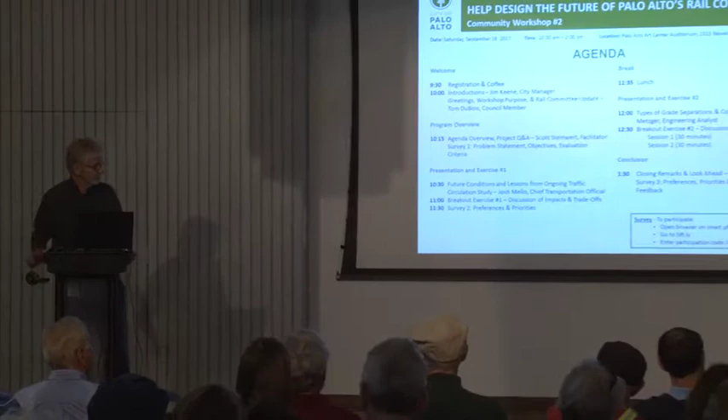Thanks, Jim. So $2.50 in 1863, that's quite a bit of money back then. So I guess Caltrain's quite the deal.

I just want to echo Jim and thank everybody for coming out this morning and participating in the process.

So today what we're going to do is work on several key components that'll help us move forward in defining alternatives for grade separations. The first thing we're going to do is confirm the definition of the problem statement. This has been reviewed and refined over the last couple of months, and was the subject of the first community workshop. Then we're going to move on to focus on finalizing the objectives and the evaluation criteria. These have been developed based on what we heard at the first workshop, as well as additional community input gathered since then. We're also going to get a sneak preview of some early data from an ongoing circulation study.

The primary conclusion I take from that study is that the real focus here is on future conditions. Caltrain itself is going to run more trains, and if high-speed rail comes, those will be additional trains. So we're looking at 20 trains an hour during peak periods, and we're also looking at an assumption of about a 15% increase in traffic in that same time frame. So there really is not an option to do nothing. That's why we're here. It's not necessarily today's conditions, but really thinking about those conditions that are going to be here in a few years.

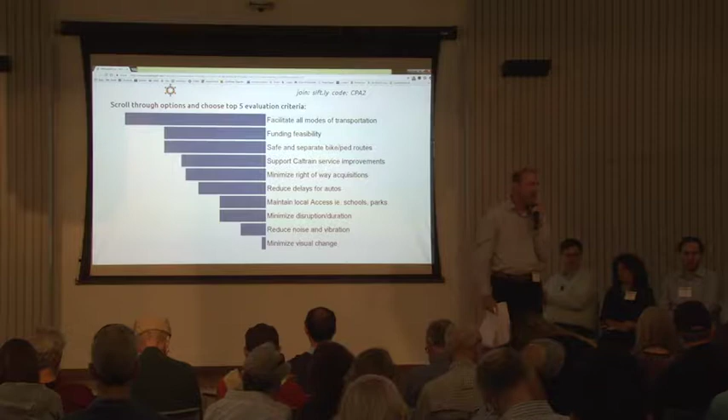So this is just to minimize acquisition — that would be adjacent properties, so private properties, to make any kind of improvement. Sometimes to build a grade separation you might have to acquire property from private properties around there. So the idea would be that if that's important, it's to minimize doing that with any alternative.

I think the first one is aimed at being a benefit, facilitating all modes would be beneficial. Reducing noise and vibration, that's kind of a benefit, addressing making things better than they are now. But if there are specific benefits, those are good comments to write down so we can capture that.

Yes, yeah, think of it in that context. Yes, sir. What's that?

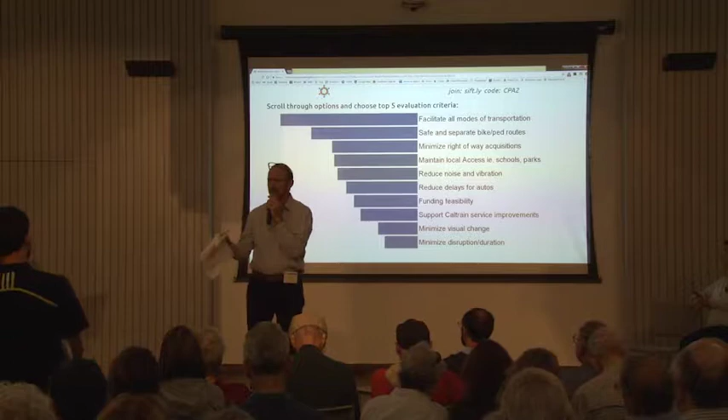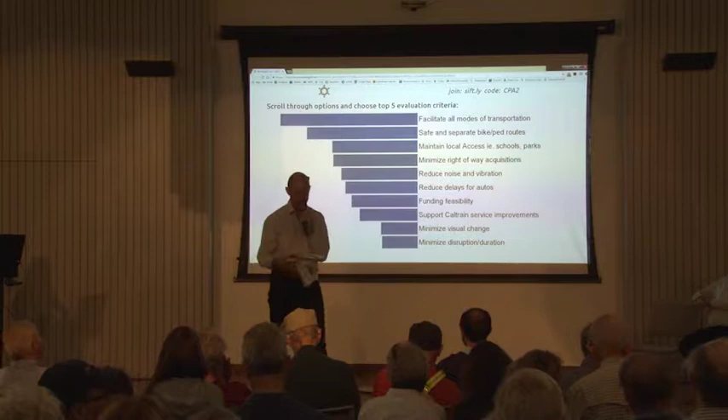Vitor has a microphone. You're talking about having a younger generation involved in the decision of this, as opposed to the older. I'm saying something very simple: for each one of these, do it first for people over 40, then under 40. It'll add maybe 1 or 2 minutes, and see if it makes any difference. Maybe we can try that at the next one. We don't have time today, but that's good. Maybe we can try that in future surveys to see if there's a difference of opinion based on age category.

Okay, all right, I think we need to move on. We've got the last few votes. That's the last one, okay.

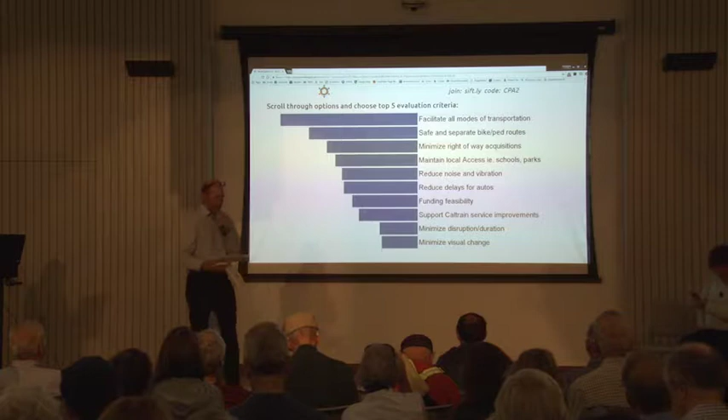So we're going to move on to the second part of the agenda and have a presentation by Josh Mello about the future conditions and lessons learned from the traffic evaluation. And then after that, we're going to break into some groups around the room and have some group discussion.

Wow, so after that I'm a little hesitant to get up here. Please go easy on me. I'm going to give you a presentation. I'm Josh Mello, the city's chief transportation official. I manage the city's transportation division, which is everything from traffic signals and pavement markings to our shuttle service. And I'm the lucky one who gets to be the project manager for this Connecting Palo Alto process.

I want to thank everybody for being here, I really appreciate it. This is really good turnout. This is going to be messy throughout this process because you are coming along with us. Part of this process is we're going to be very transparent and you're going to see the sausage being made, and that's why we're going to have these kind of somewhat awkward discussions and we're all going to be working through this.

So what I'm going to present, I'm going to have to go a little bit quicker than I originally intended because we lost some time early in the morning, unfortunately. I'm going to talk a little bit about an ongoing circulation study where we've done some preliminary modeling runs to look at what happens if, and I'll talk a bit about those ifs as I get into this.

So we did a study using models that are best practices in traffic engineering. They are models though, so everything I present is hypothetical and based on a computer program. It's not airtight, it's not 100%, but I think it's going to give you some ideas about what the future is going to look like if we do nothing, and then what if we do move forward with some projects.

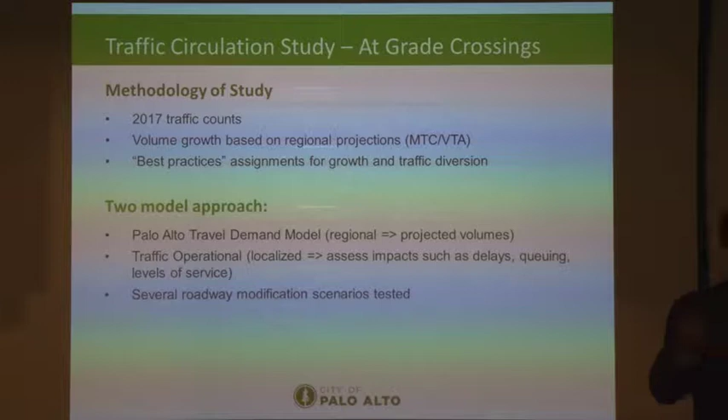Then we projected growth out to 2020, 2025, and 2030 using the regional growth models. So MTC and VTA have zones - the whole region is broken up into little zones, and they assign the number of jobs and the number of residents that they expect to inhabit or work in each of those zones in defined time periods. So we use that.

We did a two-model approach. We do a very macro level model, which uses a program called Cube, and that is accepted by MTC and VTA. It's a very standard practice when modeling roadway projects, but again, it's a model, so it's not 100%. Then we use a second program called Synchro, which delves down a little deeper and looks at traffic signal operations and projects out the queues, the number of vehicles that will back up during the peak hour, and looks in more detail at the operation of the intersection.

So I'm going to talk a little bit about train frequency. This is average, so we're not talking about the actual schedule. If you pull out the Caltrain timetable, a train at 5:12 and 5:15, we look at the number of trains throughout the peak hour, and then we calculate what the average is during the peak hour. So there's going to be a little bit of difference in what you see versus what the actual schedule is. So for example, today, trains come on average every 10 minutes during the peak hour.

That top chart is in 1 minute increments, and the green arrows represent when traffic can flow across the tracks, and the red bars represent when traffic is stopped and the gates come down. So the top is the average. Every 10 minutes today, the gates come down during the peak hour and traffic is stopped. In actuality, a train comes at 14 minutes past the hour, 16 minutes past the hour, then there's a gap, 36, 40, 44. This is both directions during the peak hour.

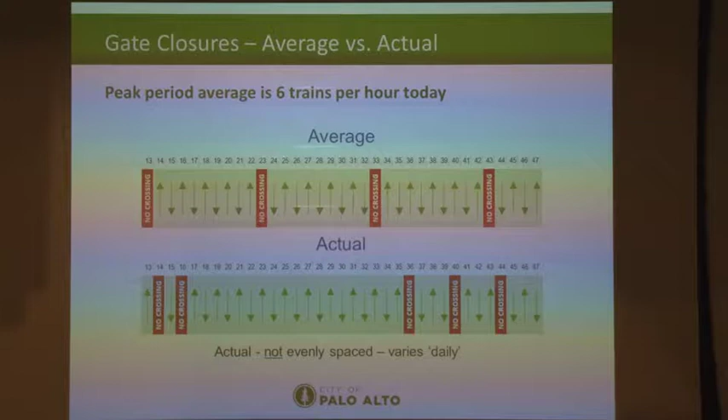Yes. This is the average during the peak hour, this is not the exact. There is 6, in one peak hour there is 6 trains, yes. I'm going to talk a little bit more about that when we get further along.

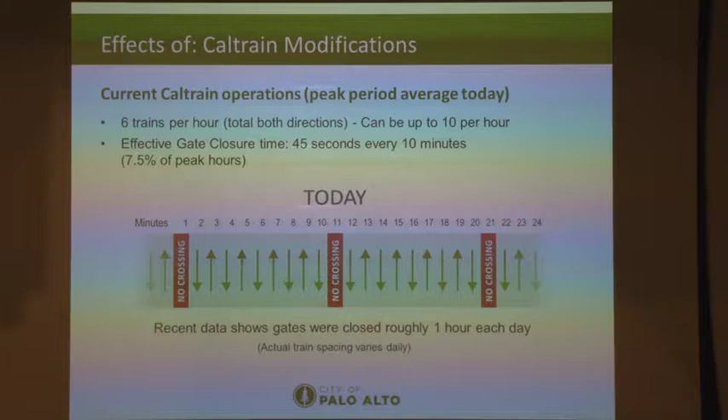So current Caltrain operations, 6 trains per hour total both directions, on average. During one hour, there are 10 trains per hour - you are correct, but not every peak hour has 10 trains per hour. The average is 6 trains. And that really, when we start to look at the analysis, we're really talking about total cumulative gate downtime, and we'll talk about that a little bit more. But the specific increments of the trains is not as important as the total time that the gates are going to be down. So the effective gate closure time today: 45 seconds of every 10 minutes the gates are down and traffic is stopped, and that adds up to about 1 hour per day. So 1 hour out of every day, the gates are closed and traffic is stopped. That's today, 2017.

I hope that was a joke.

So when Caltrain is modernized - is everybody familiar with the Caltrain modernization project? It's 2 components: upgrading their signal system through what's called CBOSS, and don't ask me what that is - it's a modern train signaling system that allows them to move in moving blocks instead of fixed blocks, which is the older way that train corridors were signalized. They're also electrifying the corridor, which allows trains to start and stop more quickly than diesel trains, so they'll be able to run more frequent trains, is the bottom line.

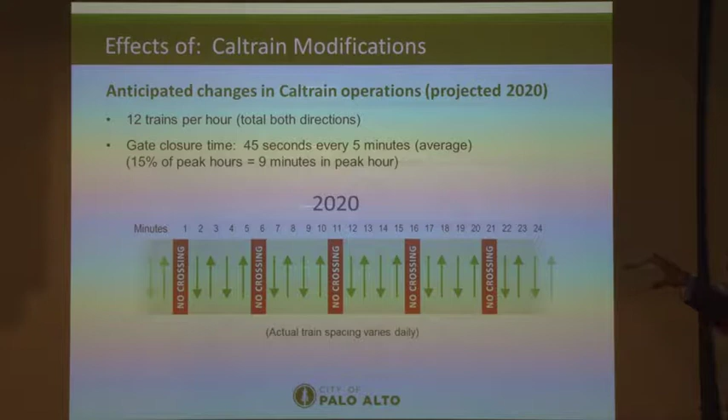As currently proposed, they're going to run an average in both directions of 12 trains per hour. You mentioned earlier the average today is 6 trains an hour, but there's actually 10 trains during one particular hour, so 12 trains per hour average could actually be more than 12 trains in one particular hour. This is the average over the peak hour. That equates to 45 seconds of every 5 minutes. So we basically doubled the amount of gate time from 45 seconds every 10 minutes to 45 seconds every 5 minutes. Yes, sir.

That's an excellent point, I'll talk about it now. Our traffic signal cycles, the time a signal cycles through all phases at an intersection, are typically around 120 seconds. So almost every other cycle, or every third cycle, there's a train coming through, interrupting the traffic signal phasing, and we have to restart. That means we can't coordinate the signals along Alma Street because the coordination is continually interrupted, and it takes a long time for the signal to get back into coordination. In reality we'd never get back into coordination because the trains keep coming. So that's how they operate today: basically on demand, not in coordination, because of the preemptions.

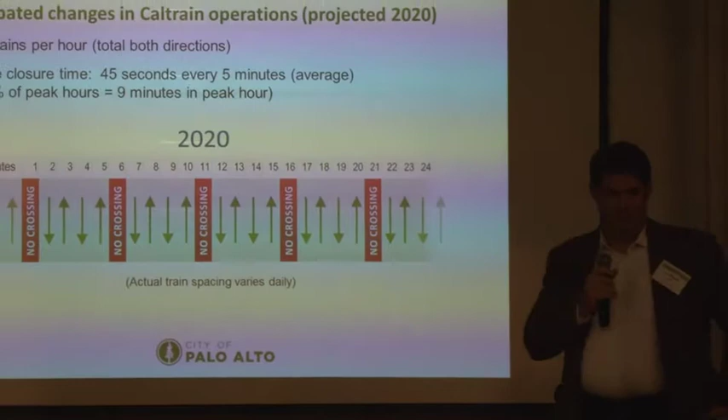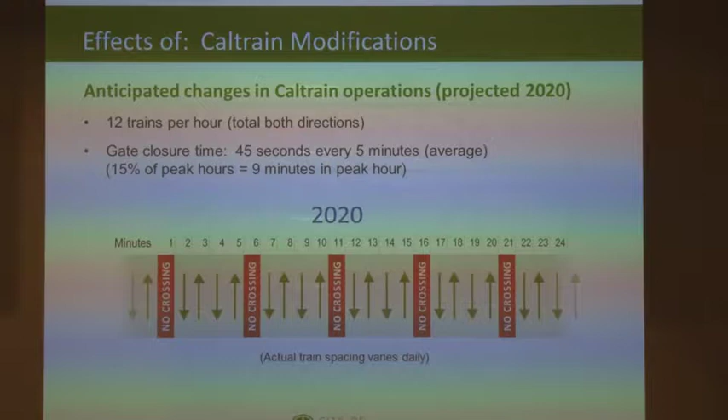Our signal cycles can be anywhere from 60 to 180 seconds, and a typical suburban intersection has 8 phases, though some signals only have 4. This is adding an additional 45 seconds of stop time on the cross street that's not part of the signal, so the signal operation is separate from this. This is just what the trains are doing to the crossing.

And we do need to move a little quicker, I apologize. Clarifying question? Yes.

There's a distinction being made between 10 peak trains per hour during rush hours and 6 average trains per hour during rush hours, according to your statistics. Yes. And now you're saying that's going to 12 average trains per hour, which could be more than 12 at the highest. So I'm trying to figure out, during the peak hour, how many trains per hour will there be? That will depend on Caltrain's scheduling, and we don't know what their schedule will look like. So the EIR process does not specify the number of peak trains per hour? We'll have to look into that.

When we talk about peak hour, we're talking about the peak traffic hour, not the peak train hour. That's an important distinction. That's why we use the average trains during the peak hour, because the peak hour for automobiles is most likely different than the peak hour for trains.

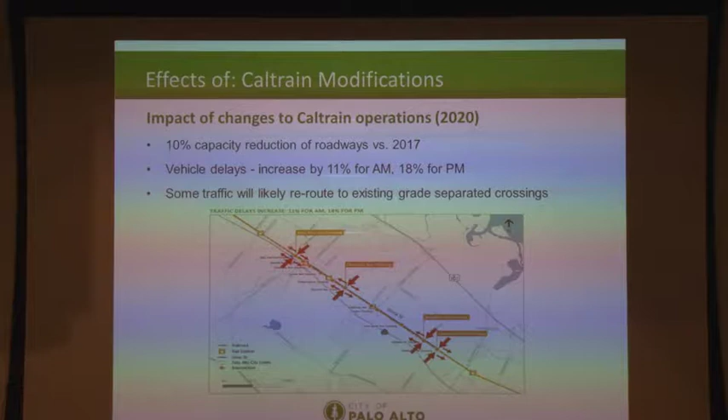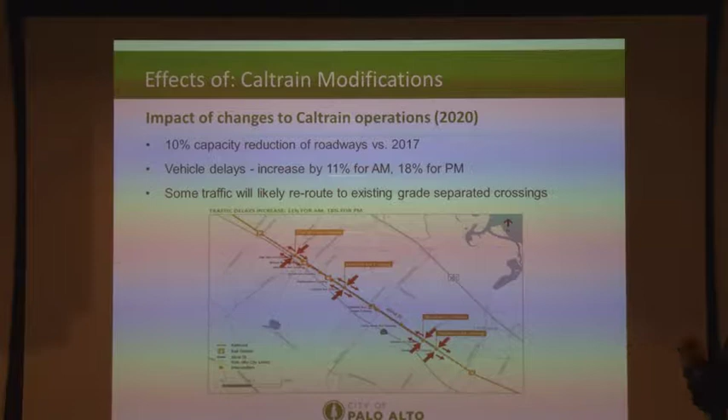In 2020, or more likely 2021 because they've lost a little time in their CalMod project due to the delay in federal funding earlier this year, if we do nothing -- don't grade separate, do nothing to our existing grade crossings -- we're looking at a 10% capacity reduction in our roadways versus today, just because of additional gate downtime from increased Caltrain service. That equates to an 11% increase in delay in the morning and an 18% increase in delay in the afternoon PM peak hour. Our model shows some traffic, not a lot, will divert to the existing grade-separated crossings at Oregon, Embarcadero, and University.

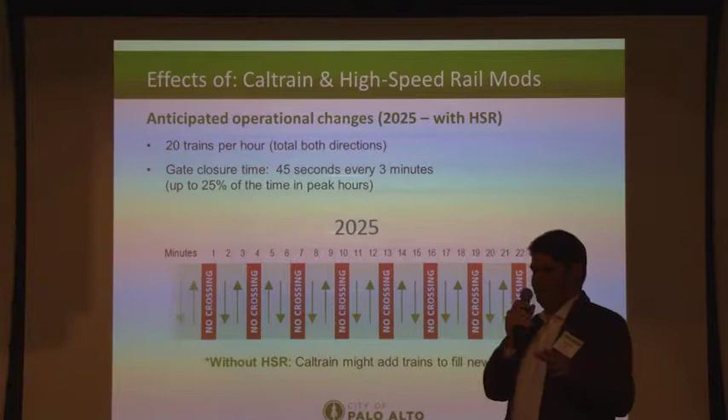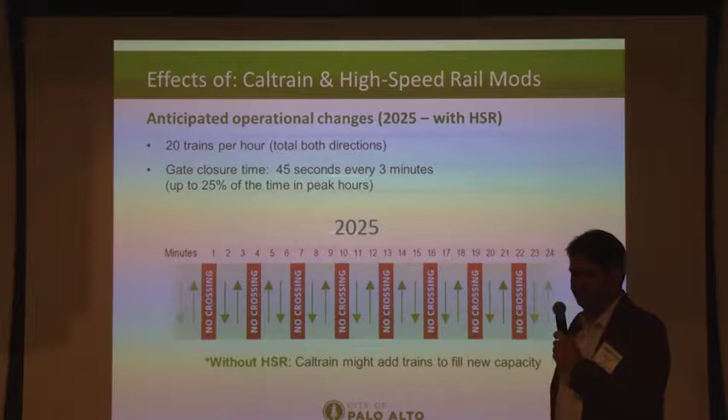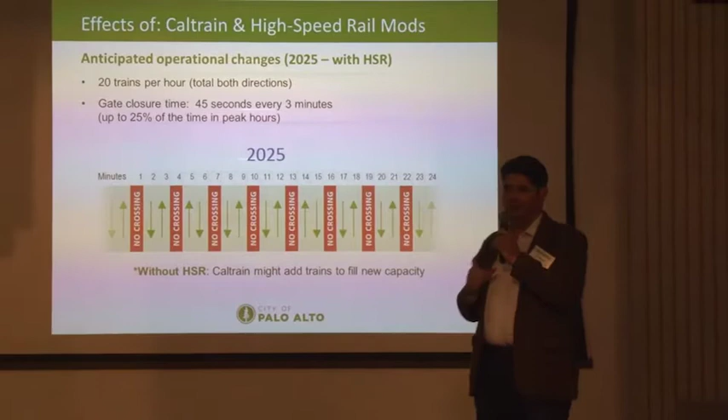Yes, ma'am. Did the PM peak hours include school dismissal times? This is not school PM peak. That's an excellent point though -- I think we need to look at the impacts during the school peak dismissal time too, especially for Churchill Avenue and Meadow. We typically do that with traffic counts; we collect the school peak and then the evening commuter peak. The peak hour varies depending on the location. We count in 15-minute increments and take the 4 highest consecutive 15-minute increments, and that's the peak hour.

It would vary depending on the intersection. Can we go?

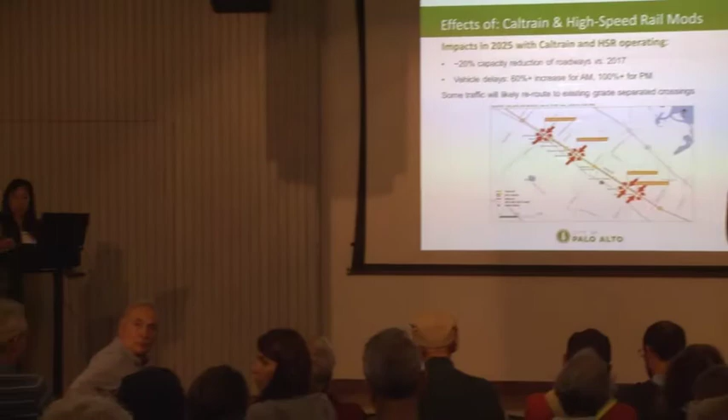So, Josh, you said it varies, but we've got the Caltrain schedule here, and this is a really fundamental basis for the data discussion. You're claiming peak hour is 3 trains per hour per direction, and we can't figure out what you're talking about. Can you give us even one intersection that you used as a reference point for peak hour?

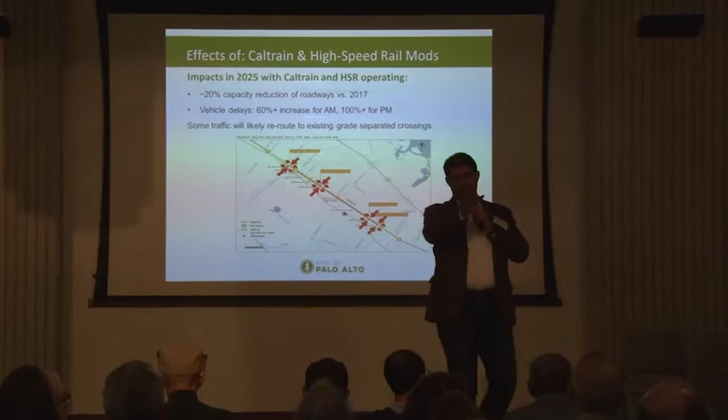I would be glad to set up a meeting with you and bring Richard, our traffic modeler, who can talk to you later today about how the modeling was done. This is a very high-level takeaway of the initial results from the model. We're not making any decisions based on this today. If you're interested, you can come meet with us and help us refine this as we go through. This is a very first look at the modeling results.

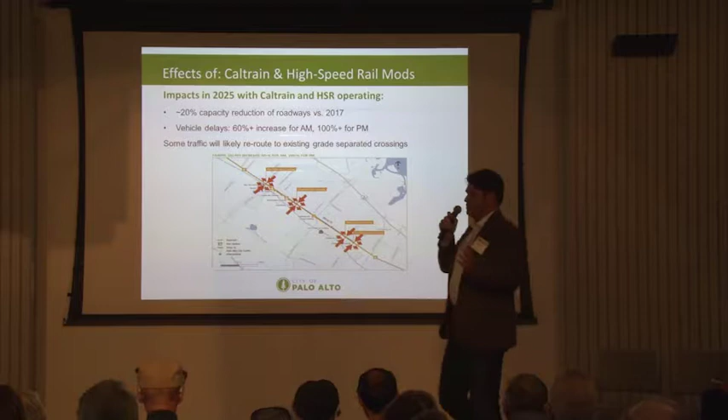What this shows is in 2025 with Caltrain and high-speed rail operating. This is a pretty ambitious assumption that high-speed rail is going to be up and operating in 2025, but that's what we've modeled. We would have a 20% capacity reduction in our roadways versus today. And vehicle delay would increase 60% in the morning and 100% in the afternoon.

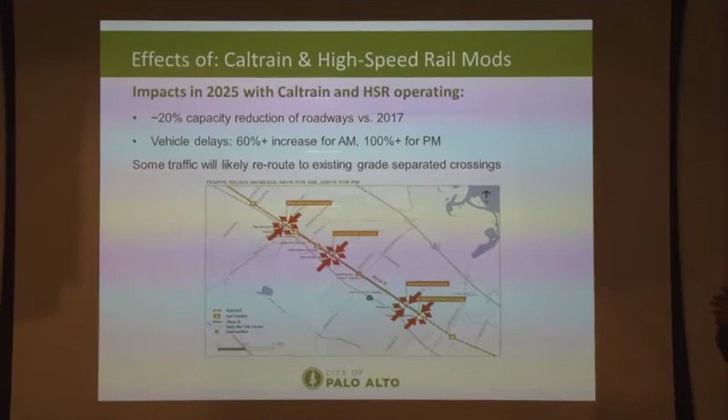So almost a doubling of delay in the afternoon at the grade crossings, and again some more traffic would likely divert to the existing grade-separated crossings. Does that assume any population change or growth? Yes, this is assuming a 15% increase in background traffic based on development and regional modeling.

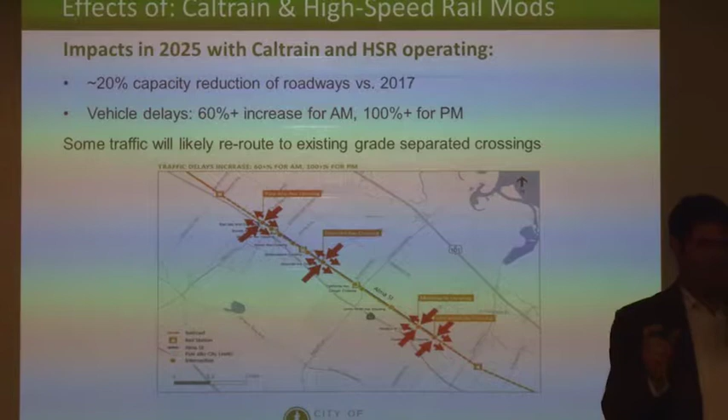Have you looked at, so can you talk to me about how much, because if you're saying that in the peak time window each direction it's going to be more than 3 trains, then if you have delays, you could potentially have 6 trains, 8 trains. Yes, and going back to Mr. Burt's point, there is a peak hour in the peak period where there's 10 trains an hour currently today.

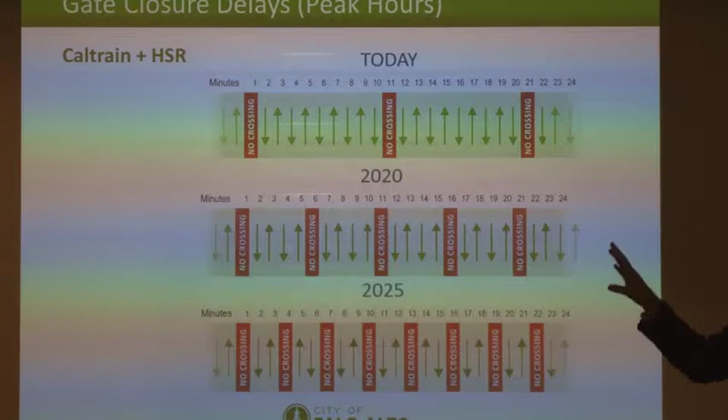So there could be an hour where we'd see much more substantial delays. This is just if we were to look at the average, this is what we'd see. But in reality, there's probably going to be an hour where we'd see upwards of 100% increase in delay in the afternoon. And this is what all three look like: we go from an average of 1 every 10 minutes to 1 every 5 minutes, and now to 1 every 3 minutes. This basically means that every other signal cycle on Alma, we're going to see a train come through, so we'll almost be in perpetual preemption by trains, and the signals won't function very efficiently at all.

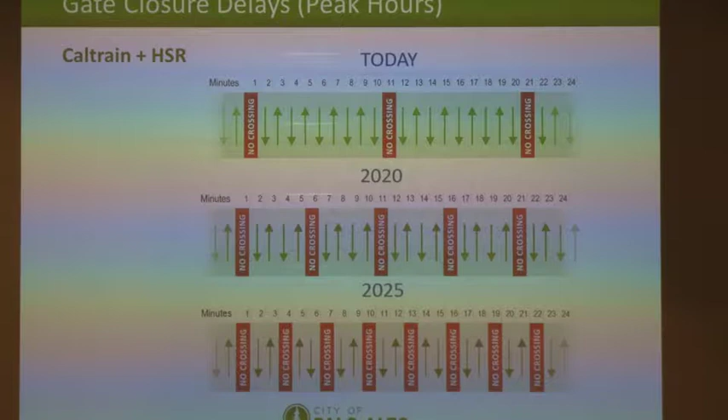Yes, sir. Sorry, so unless I'm completely misunderstanding something, there seems to be a fundamental issue here, which is you're not coordinating your street signals with the train signals. You mentioned a few sentences back that every train has to restart the street signals, and you also stated that we have no idea what the train schedules will be. That absolutely is not correct, they publish the train schedules, and you could actually use that as a baseline to work against.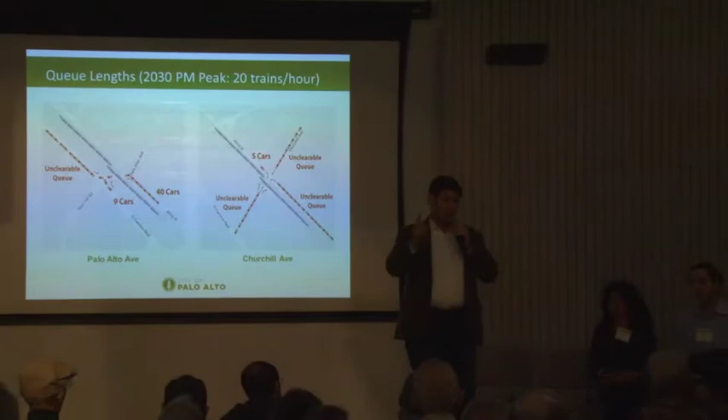So currently, as configured, the communication between the Caltrain signal system and our traffic signal system is one way. Caltrain tells us a train is coming, and our signal cabinet automatically implements the clearance phase, which is usually a green for people to get out of the track area. Then we serve Alma Street, and then we restart the whole cycle again.

There's no two-way communication. Second, in regard to your point, signal timing is a very complex thing, and I'd be glad to go through it with you in more detail, but our signals operate on second increments, and the train may say 5:12, but if it leaves at 5:13, that's halfway into a cycle along Alma Street at one of the intersections. So our signals operate on a very tight timeline compared to the train schedule.

Your cycle is out of sync with the train cycle, that's the issue. But we can talk more. I'd be glad to have you come into our office so we can look through our signal timing plans.

Do you also model the estimated expected number of accidents, injuries, and fatalities on the Caltrain corridor? We have not done that yet, but we've looked at the history of collisions at the crossings. That's an excellent idea. This is just an overview of the traffic circulation study, so we're not talking about safety in this presentation, but safety is definitely at the top of the list.

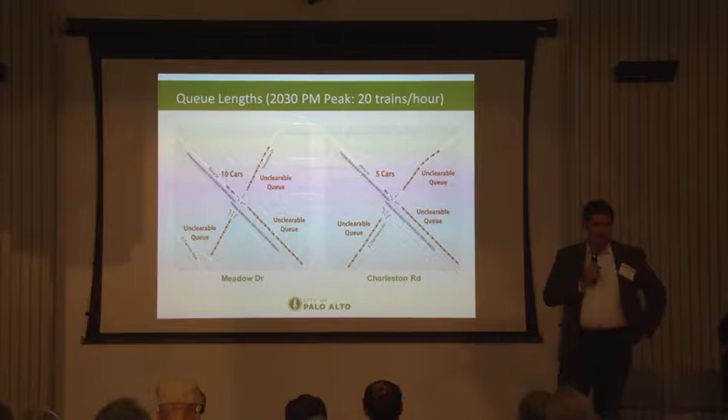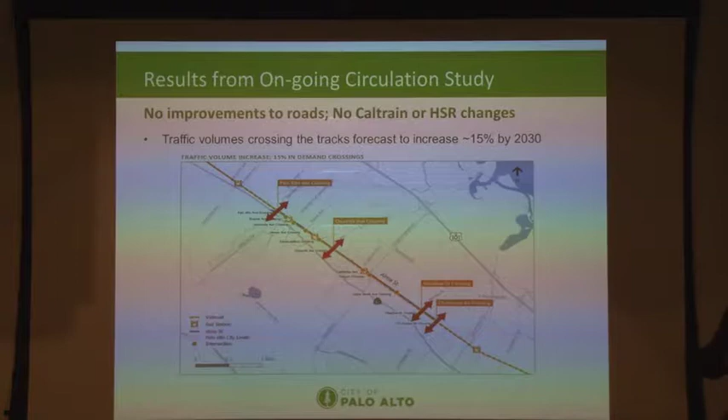We also looked at what happens if we started to play around with our grade crossings, and hypothetically, if we closed a couple grade crossings, or grade separated a couple, what happens to traffic at a citywide level—not at the minutia level of that particular intersection, but what does the city traffic circulation look like?

If we do nothing—no improvements to the roads, and Caltrain and high-speed rail does not come to fruition, which is pretty unlikely—we still see a 15% increase in traffic by 2030. This is the background condition without any grade separations, without any rail corridor increase in service.

If Caltrain and high-speed rail operate as planned, and we do no grade separation—just leave our road network as it is today—we still see a 15% increase in traffic, but people start to divert to Embarcadero, University, and Oregon Expressway.

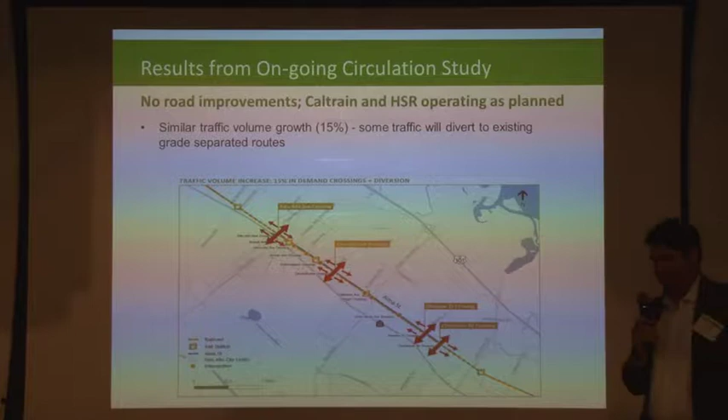Yes, we have that available if you want to look at that.

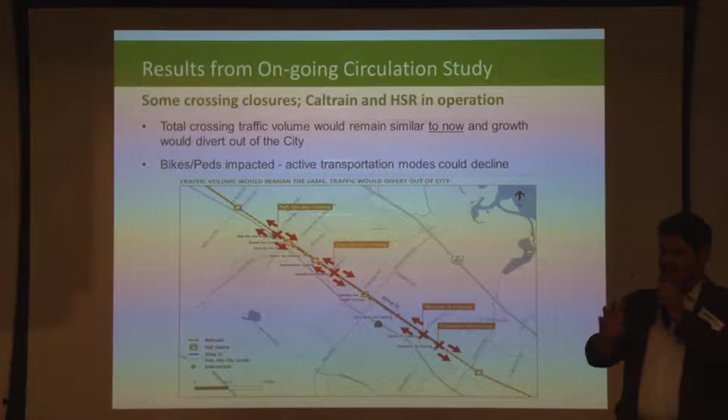If we do... we have a model that shows today's conditions, and then we have 2020, 2025, and 2030. If you want to look at those different years, we can certainly compare them more closely. As we move through this, we're going to have a lot of technical papers come out, and there's going to be a lot more opportunity to delve deeper. This is just a very quick overview of what the models are showing.

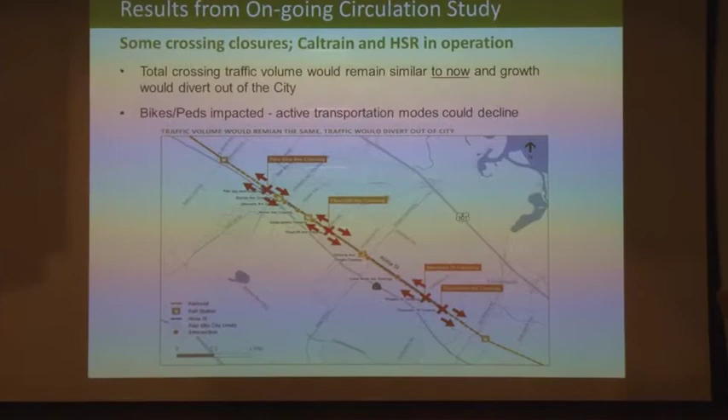So if we were to close some crossings—again, this is very hypothetical—if we as a community ultimately determine that maybe closing one might be something we want to look at, something to keep in mind is that the total crossing volume would stay similar to now, but we would start to divert traffic outside of the city.

People would look for the quickest route from 101 to the job centers, and it may be that they start going through Menlo Park and Mountain View. Closures could also decrease the number of people walking and biking, because the routes for walking and biking would become much longer and much more circuitous. So that's an impact from a closure.

On the flip side, if we were to do grade separations—this is pretty surprising to me when I saw this initial run—crossing volumes would increase by over 20%. It's the old induced demand: if you build it, they will come. If we were to grade separate a crossing, more people would find it more convenient to cross the rail corridor. It's intuitive when you think about it, but we could actually see an increase in traffic across the rail corridor. And if we only do one location, it attracts about 5 to 10% more traffic.

We've only looked at a couple of scenarios here, and one of the things that would be helpful moving forward is if you guys want to talk about different scenarios in the next breakout session, that would be helpful.

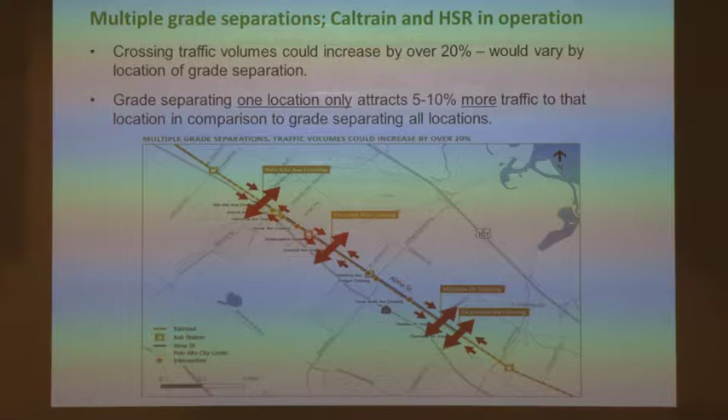It includes the regional travel from the regional travel model, so it's not just a Palo Alto modeling exercise—it's from the regional model, yes. And that is it for my presentation.

How did I do on time, Scott? I think we're doing fine—any kind of one outstanding question I can answer before we move on, yes sir?

Does your planning include changes in traffic like mobility as a service, the fact that people won't have cars that they own in the future? So the regional travel model is pretty conservative and estimates that people will drive at similar rates as they do today.

But certainly we do push back a lot on that and say that we're doing all these TDM initiatives and we have a TMA, and Palo Alto may not grow at the same rate as other cities, but that's something we can dive deeper into.

Great, I have to break in. Let's move on, because now we want to give you an opportunity to talk. We've been talking at you, now is the time to hear from you.

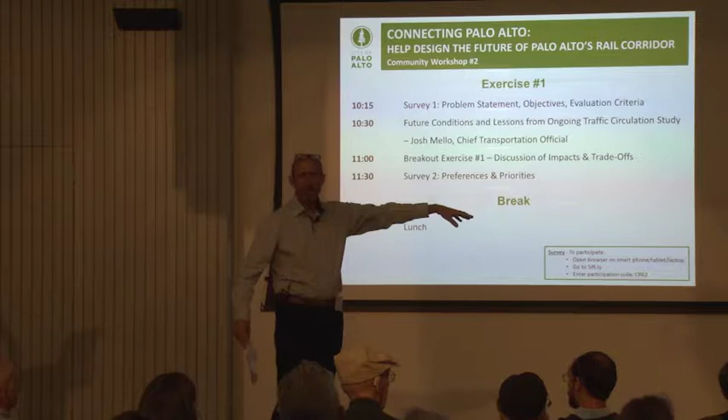What we want to do is organize ourselves into 4 groups where the maps are around the room. You can walk over, bring a chair if you'd like, form groups there, and we'll have a discussion about the traffic information presented and talk about alternatives, like closing grade crossings, like Josh was saying, or opening them.

Is that a good idea, a bad idea? What other ideas should we be thinking about in terms of alternatives?

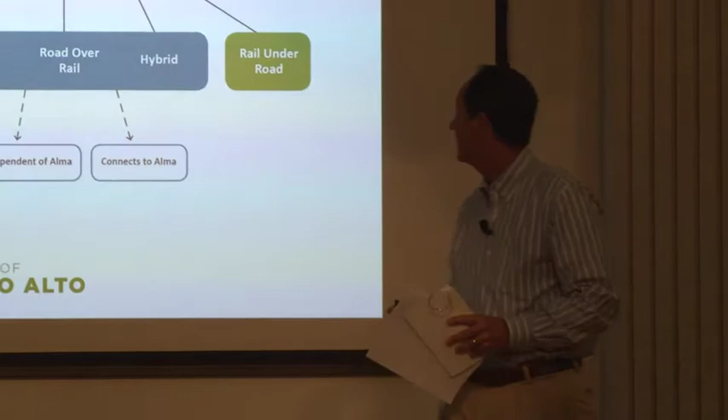So we're going to look at potential changes to any of the 4 at-grade existing crossings. What we want to show here is that there are a lot of options. First, you start with the 4 locations, and for any of those locations, there's a range of things we can do.

Based on the conversation at our table, this is not a complete range. We did have one more added, which would be the rail over, and others as well. So that was the purpose of this morning, to get those on. But I think the discussion is completely valid, regardless of the numbers you add.

But if you look at any of the 4, we can do nothing. So we talked about that. That's pretty obvious what that means, and there's no other decisions to make from there.

We can close any of the roads, so there are 4 different options for closure. And within that, there's a choice, which was talked about at quite a few of the tables, which is you can either take bikes and peds across independent of that, or eliminate all crossings at that location. So there's a tree of decisions to be made at any of the locations.

And then we're going to go through and talk about each of these. We can then take the local roadway and go under the rail if we wanted to grade separate it.

We can do that independent of Alma, meaning it goes under the rail and under Alma without connecting to it. Or we can bring Alma down and connect to it, so Alma would be depressed and the roadway would depress. That's one option in a series of taking one of these and going down through that tree.

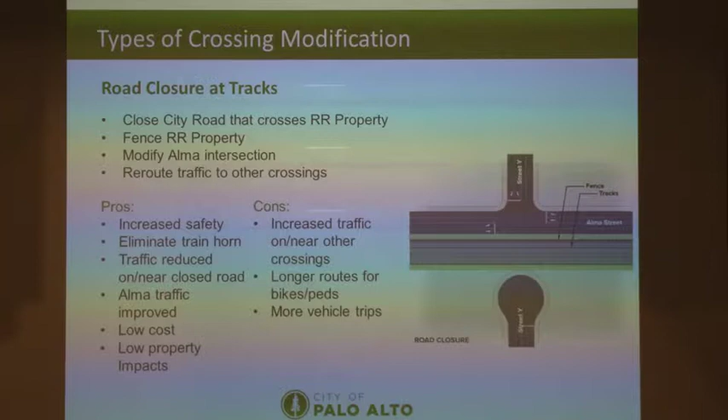A sample of that is North California Avenue, where you can see it's a T intersection, as we showed at Alma, and basically a cul-de-sac end-of-road situation on the other side of the railroad tracks.

There would be retaining walls on either side as you head down under the tracks and potentially under Alma. Trains stay as they are - fundamentally, at the end game, there's no change for them. Then again, we could lower Alma to the local road elevation or not; that's one of the variations.

Pros: increased safety again, eliminating the train horn, and improved traffic flow on the grade-separated streets, so you no longer have to stop at the railroad tracks.

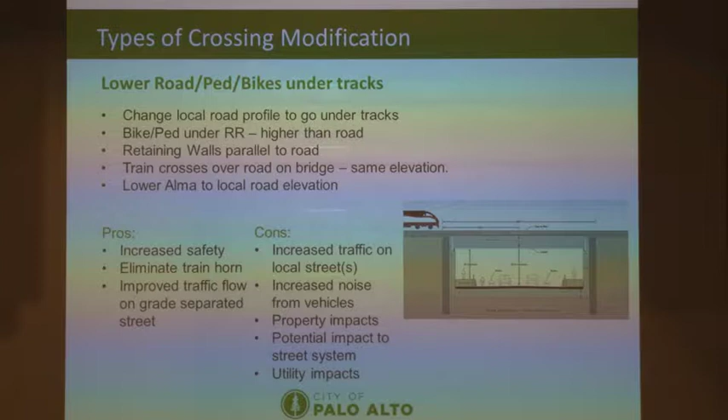You can't do that thing with the pedestrians, because otherwise the two planes don't meet. So it's just one consideration when you're thinking about lowering Alma or not. If you don't lower Alma, you can do something like they have in Embarcadero. But if you don't do that, you have to have the pedestrians all the way down. So on the Alma side, everything has to be at the same plane.

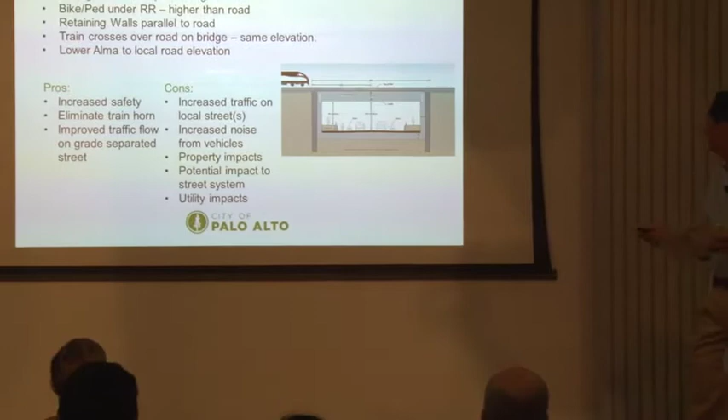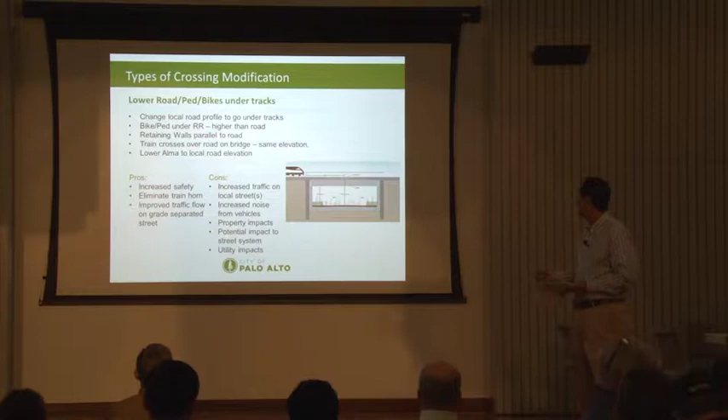There are obviously variations on the variations and options on the options there. The cons in this case: there will be increased traffic, as Josh pointed out. If you build something that's better, people will come to it, so that will tend to attract traffic and increase noise from vehicles in the local area. There are property impacts for the folks adjacent to the local roadway, a potential impact to the street system on a broad basis because things would change, and there would be utility impacts on the local roads.

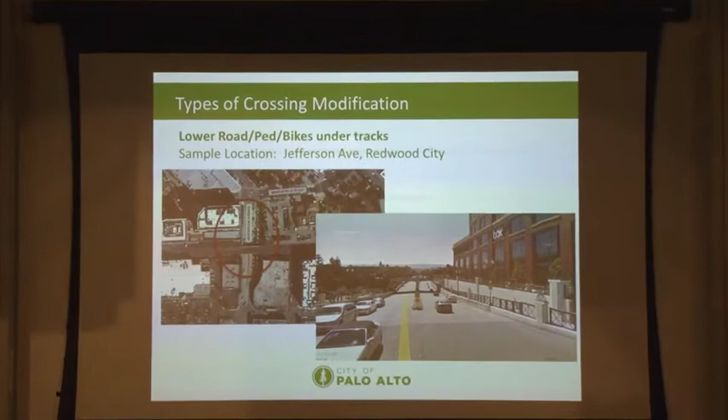What about personal safety? The idea is that petty crime risk would be higher in an undercrossing. We can take that as a comment. We will have chances to address all of these at the tables, and we'll collect all of those thoughts as we go.

An example of this is Jefferson Avenue in Redwood City, if anybody's familiar with that. You can see it in plan view here with Middlefield to the top of your screen, extended from intersection to intersection. This is a view of what that particular crossing looks like, and this one does have a different elevation for the sidewalk than for the roadway.

The question is, if we grade separate all four, does that still attract traffic? In general, the answer is probably yes, because people will divert to others, but we would study that and look at it specifically.

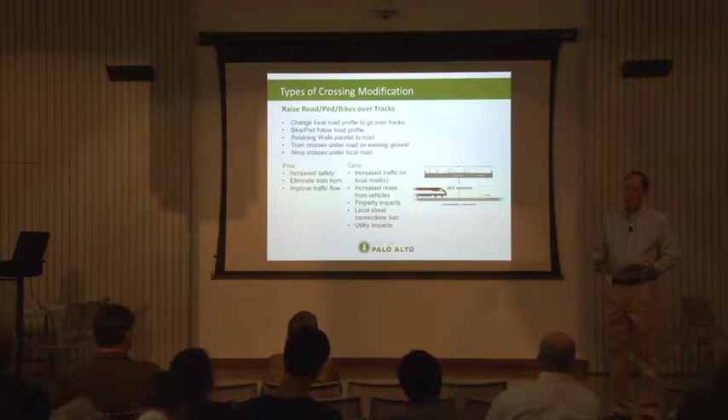The second part of the question is, how many homes will be affected by each of the models of grade separations? Do we have data on that? Because that's going to affect our decision process for each of the different alternatives to grade separations, and each of the different alternatives for each of the grade crossings.

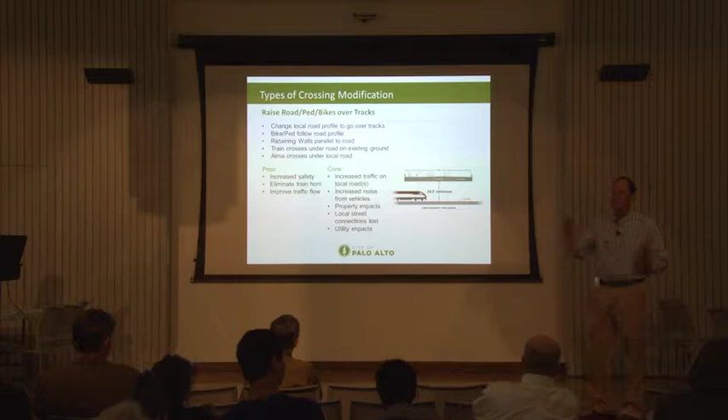At your tables, you'll go through an exercise where that will become readily apparent. We have some exercises to show that. We've done some studies, but they are preliminary in nature, so take those as concept. When you're looking at your tables, those properties immediately adjacent, using the tools you'll be using, are those that would be impacted. There are all types of impacts - not every impact is a complete property take, and there's a whole other discussion on that.

So the next avenue to grade separate is to take the local road and take it up over the train. Caltrain, et cetera, would stay at grade the way they are. The local road goes up and over, and in this situation, we need to keep the clearance - that's the driving aspect of this configuration - so we keep the pedestrians and bicycles at the same elevation as the roadway.

I can finish just these pros and cons. We'd have retaining walls as we approach from the east-west direction to the railroad tracks. The pros, again: increased safety - primarily for the users of the facility, though we didn't go into whether there's a change to neighborhoods in terms of safety - eliminating the train horn, and improved traffic flow on those roadways. Very similar to the other crossing, the same types of cons apply: increased traffic on the local road, increased noise from vehicles, property impacts, local street connections lost, and potential loss of utilities.

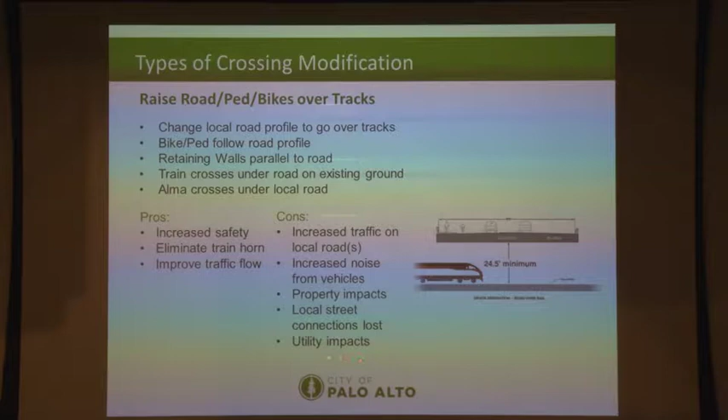There's many samples. We picked one that would seem like it was relational in terms of the size that we might expect to see. Excuse me.

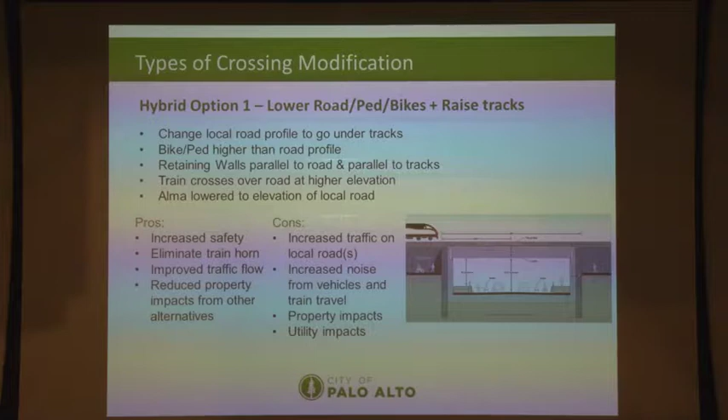On that last slide where you were increasing traffic, if all the grades get improved, I'm curious how that increases traffic when you put the road over.

So if you have a new facility that's closer to where you live, say, and you've got to cross the tracks to get to work, maybe now you go to Oregon Expressway, maybe now you go to Embarcadero. Maybe this becomes better. Does that increase traffic? We would have to study that to see what the change would be. The world is dynamic and people are fluid and they find the best route for them. So we would model it and see. But the expectation is, if it's better, just because of the locality of these and the local impacts, there would likely be more traffic with any grade separation.

I'm interpreting the question to be: does traffic increase on that road? So we had Road Y there before in the original, right? That road currently has, let's say, 10 trips in the peak hour.

Quick clarifying question: I think I saw that the train needs 24.5 feet, correct. How much does a roadway typically need? We'll get to that - we have a specific slide on that for you.

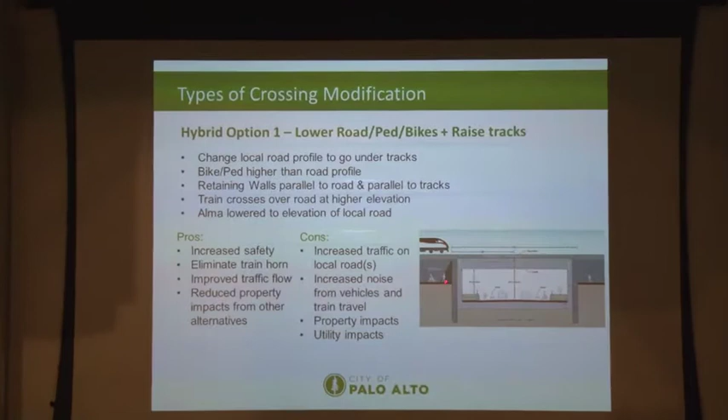Where we show, hopefully you can see it, some bike/ped movement - that's the existing ground. The roadway goes down a little bit, the railroad goes up a little bit, so that's on retaining walls. There's retaining walls down. Very similar pros and very similar cons, slightly tweaked. You can see how as things move up and down, what's adjacent to what is impacted by that.

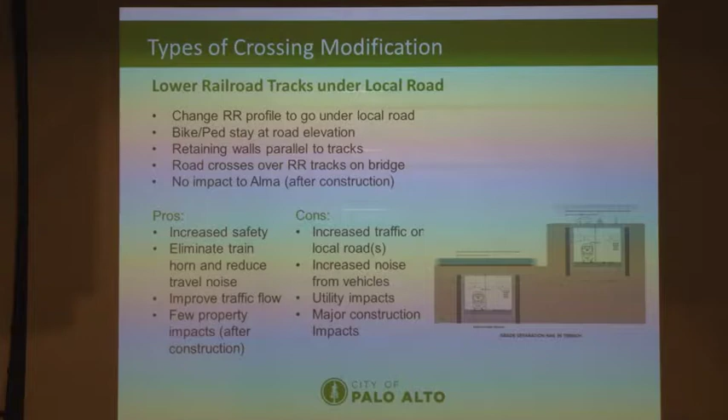You've missed one major pro in that, which is that it allows eastern Palo Alto to be connected with western Palo Alto with no more impediments. We could have many more railroad crossings. We could have a parkland up and down Palo Alto. That's a huge pro, which you didn't list. Okay, noted.

Quick question about your picture. Why do you have two different levels on your picture? Sorry, if you go back one slide. What are you trying to show with your picture at two levels?

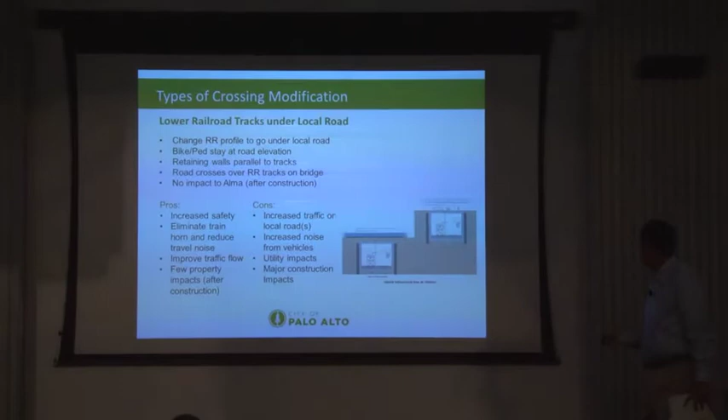There are different areas we have to cross. This is a local road crossing where we just have to go down deep enough to get under the road. There are other areas where we have to go under creeks and rivers, and that's a deeper cross section. In that case, there's an extra depth that needs to go. You have to find the bottom of the creek, and you have to leave enough for it to be stable. And then you have to go down quite a bit deeper under the creeks.

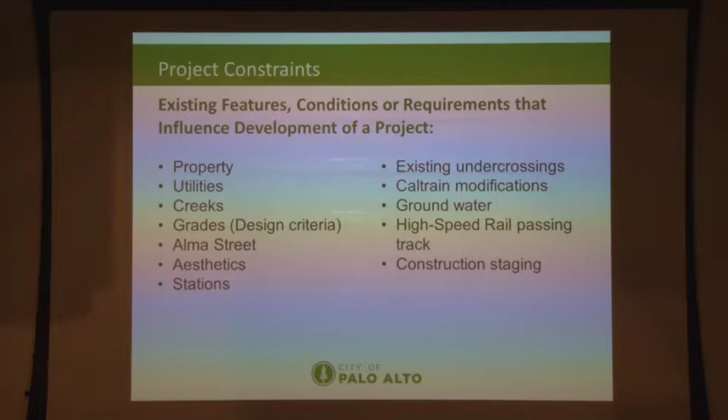So now those options — and again, there might be others that were brought up in the first conversation — there's a lot of different constraints to deal with on any of them, and you can see there's a very long list, so I'm going to fly through those. This nice little packet of baseball cards, as they're called, is on every table. All of these are on there, and every one of these needs to be considered at every location for any option. So we're going to go through it pretty quickly.

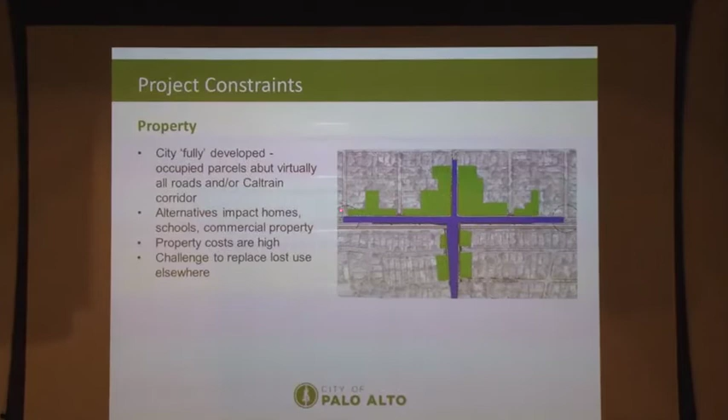We talked about property. You can see a typical type of situation where we're going to grade separate. All of the properties in green would be impacted. Again, it doesn't necessarily mean a full acquisition, but there probably are some acquisitions, and every one of those is impacted, so there's quite a bit of impact. The range of properties includes homes, schools, commercial property. I think everybody knows property is fairly expensive in Palo Alto, so the challenge is to replace any lost use. That is a difficulty.

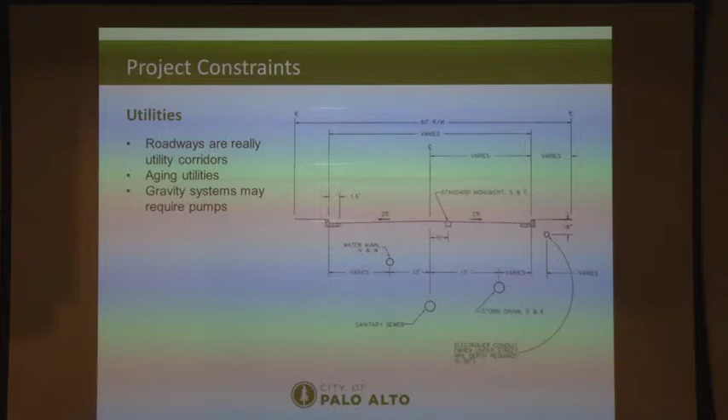Utilities — for most of the folks in the room who are not engineers, you probably think you just drive on the road. For those of us who are engineers, we don't see a road, we see a utility corridor, a place to put everything you need every day. You need water, you want to flush your toilets, the sewer's got to go somewhere, storm water has to go someplace, you want to have communications. So all of that goes in the road typically — power, gas. This is actually a fairly simple picture. Most roads, especially in Palo Alto, that have been here a while, have quite a few utilities, and that would need to be addressed.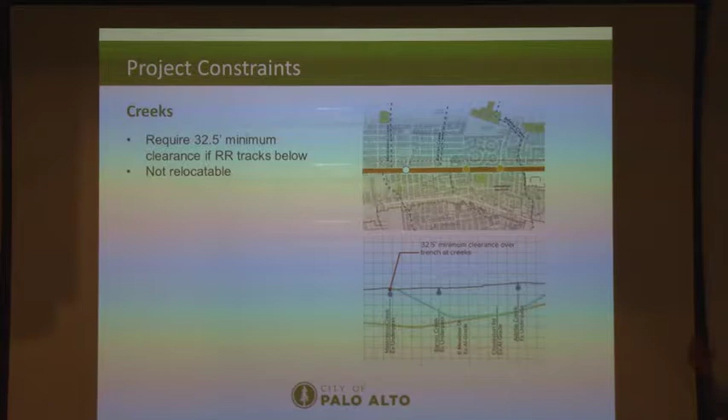We talked about the creeks, so the creeks can be an impact on some of the alternatives. You have to make sure those are kept in good shape and not impacted. A 2014 Hatch Mott MacDonald study said that they can be relocated up to 500 feet. So which assumption do we have? The assumption is they would still be required. If there are things you can work with the local entity on, that would be worked out, similar to a vertical clearance change. But the assumption at this point needs to be that you have to have that creek, you have to have that capacity. I know the Water District right now is upgrading, and all the agencies are upgrading San Francisquito Creek, so they're never going to get smaller, only larger, and they need to be there. Adobe Creek is kind of L-shaped, and if you flip the L to the other side, you get about 500 feet that way. So there are things you could do without even relocating creeks out of their current right-of-way. There are opportunities, but they are constraints that need to be dealt with, and it's not to say we can't deal with any of these things.

We love to deal with these issues, but they need to be dealt with. That's the point - is there impacts?

So the next is design criteria and grades, and we talked about this a little bit. It affects two different things: one is how fast you get up and down something, and in this case we're showing something for pedestrians or folks with challenges to get up and down. So we have minimum and maximum slopes we have to adhere to whenever we're moving pedestrian movement. We also have minimum clearances that we work to, and yes, we can negotiate these at times, but these are the standard regulatory agencies. So bikes and peds can go under something with only a 10-foot clearance. Vehicles need 15 feet or more, and trains need the 24 and a half.

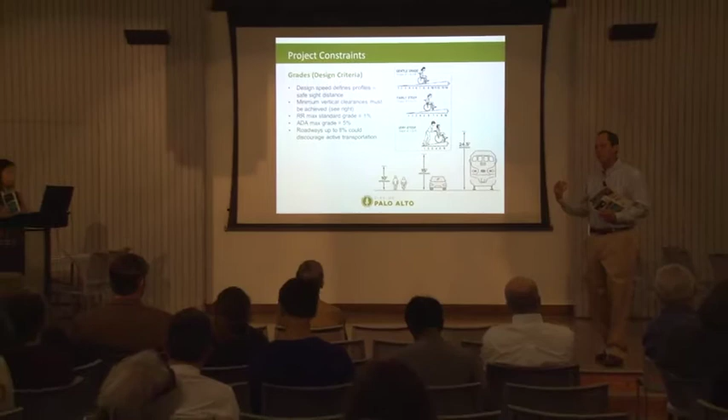Is the 1% rail standard a freight standard or a passenger train, particularly electrified passenger? It is generally applied to freight, but it is currently the standard that is for the line, and that would have to be negotiated. It's not to say we couldn't negotiate it, but no agency - if you went to the city and asked them for a carte blanche change on any of their standards, they'd say no, give me a specific change to any planning, and then you deal with it from there. This is the same thing with the city going to another regulatory agency - they won't carte blanche say yeah we'll go with something. You have to bring a specific thing to get approved.

Specific location for the variance? I mean a specific design request change, specific to that location for this reason. You have to justify it.

Just a clarification - it's 1% grade. The Caltrain rules and regulations are actually online. If you read the Caltrain rules and regulations, they can go up to a 2% grade maximum. You have to ask the Caltrain design engineer expert, who now doesn't exist. But if you read into the documents, you can see that Caltrain has already worked with Union Pacific, the local freight company, to make sure that all future operators will operate at 2%. So despite the fact that the standard thing is 1% right now, a 2% is absolutely feasible and is currently the finished negotiation to be any day now.

Which is true, but just like BART - I've recently been working on BART to San Jose - yes, BART standard is 3% for their trains, and they say they can go to 3.5%. We did get some approvals for 3.5%, and we did not get some approvals for 3.5%, depending on the conditions. So it is all negotiated every single time. It is possible, but it is all negotiated.

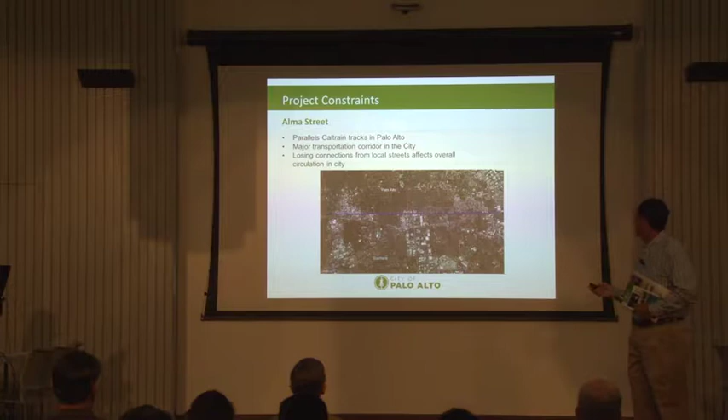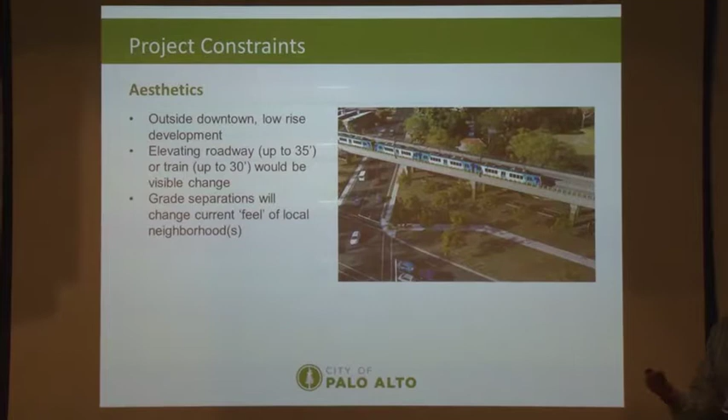Alma Street is a constraint, as we talked about - it's parallel, it's right there. Many things are going to impact it. Aesthetics - anytime anything's changed, it's going to change the character of the surrounding, whether it's up or down, there will be some type of visual impact. So that's always an important element of any public works project.

You didn't talk about road slopes - there was the pedestrian slope and bike slope, but there wasn't a road slope spec. Well, that varies. What matters for a roadway is you have the vertical clearance, and that's the primary driver of your roadway profile. Then you have to make sure that when you're driving on the road, you can see far enough to stop at the speed you're traveling at. So those change depending on the road and so on. But what governs a roadway design primarily in this would be your vertical curve. Your maximum slope might be 6-8%. That's a design element that typically doesn't govern directly - it's more the vertical curve, so you can see, so you can stop. That's the requirement - you have to be able to see. So if you're going over, you're going under, that's going to drive the length of it to make sure.

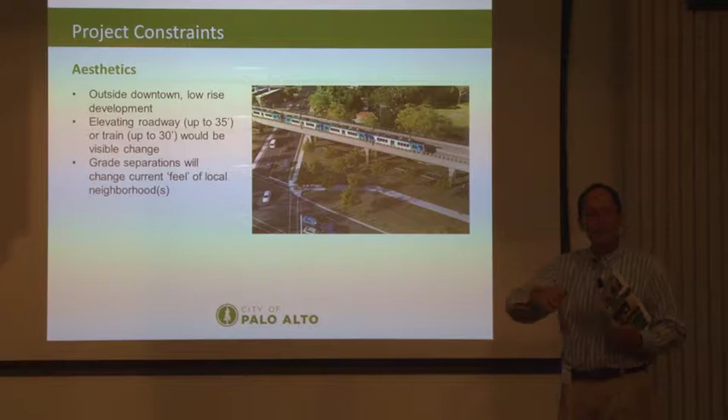So that's all on your table, you're going to see it. We got examples of that on the tables, and we'll talk through that.

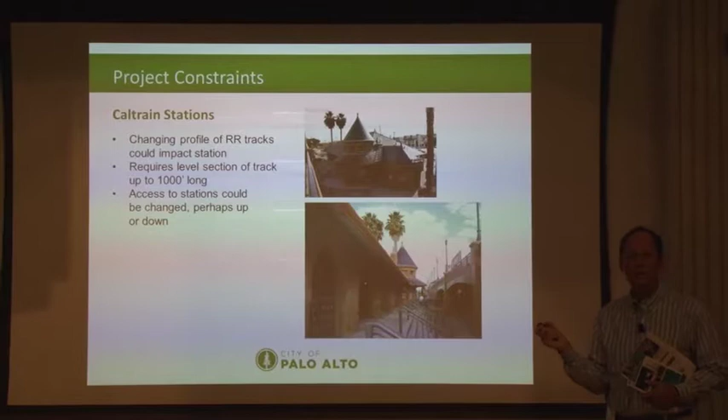Okay, Caltrain stations. If we look at modifying the grades of the Caltrain line, if it gets close to a station, it can impact the station, and then you have to reconstruct a station, which requires about 1,000 feet long of level track for boarding. So that's a major consideration.

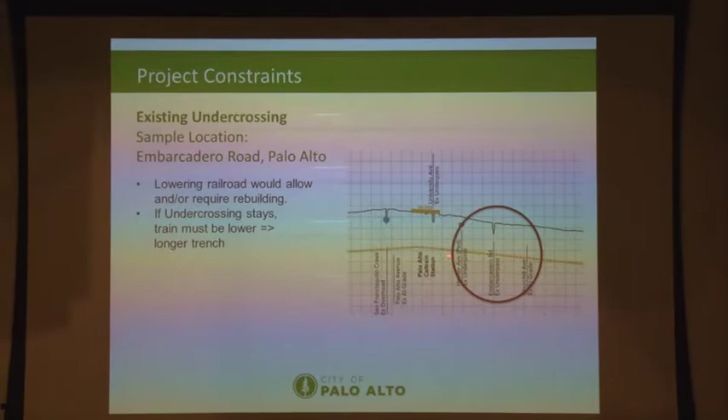Existing undercrossings - again, if we're looking more at modifying the grade of the railroad, which is shown here, the existing ground is shown up here. This denotes the fact that Embarcadero is lower than Alma. Then you have to go further to go under the Embarcadero.

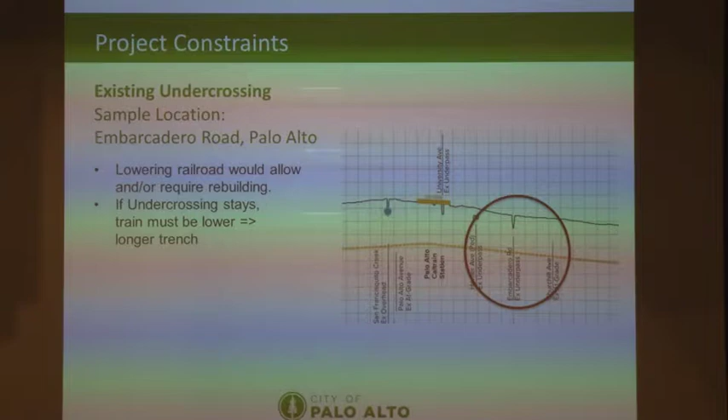Is this for the entire 4 miles?

Buying the houses, in the back, the microphone. We really want to make sure you guys are on the microphone so your questions get recorded. Do your estimates include the cost of buying the houses?

These are rough order of magnitude cost estimates, and there is some money in there for impacts mitigation, but this is very rough.

Why is the cost of a trench so much more than the Hatch Mott MacDonald study, where they had looked at if there was a trench at 1%, it was $1 billion, but if it was at 2%, it was $480 million?

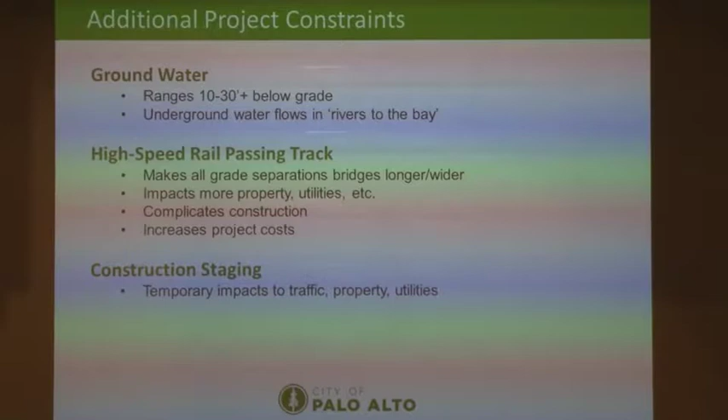High-speed rail passing track is a possibility, so that's why I wanted to get to this slide for your question. Those are not considered in any of these to date. It's something that needs to be figured out and considered, as that would have a great impact and be a constraint.

Construction staging is a huge element depending on what the fix is, because you either have to say we're going to stop something. I'm assuming Caltrain service is not going to stop, maybe roadways stop at times, we shut them down for a period of construction. But generally everybody wants to keep moving and going, so you have to move things around, and that takes land, and that takes time, and that takes money.

Okay, can you go back to the previous cost slide? So when we're talking about constraints, you had said that you're using any existing regulatory limitation as if it's a fixed constraint, even though in the case of Caltrain, they're actually saying the 2% is the model that they are anticipating.

Yes, there have to be waivers granted for that. As others alluded to, we had the Hatch Mott MacDonald study that looked at 1% and 2% grades for the Charleston and East Meadow crossings, and at a 2% grade, which is what Caltrain is essentially anticipating with waivers to grant, the difference was, I think, $340 million with property takings that would be necessary for underpassing, or I think it was $510 million for trenching.

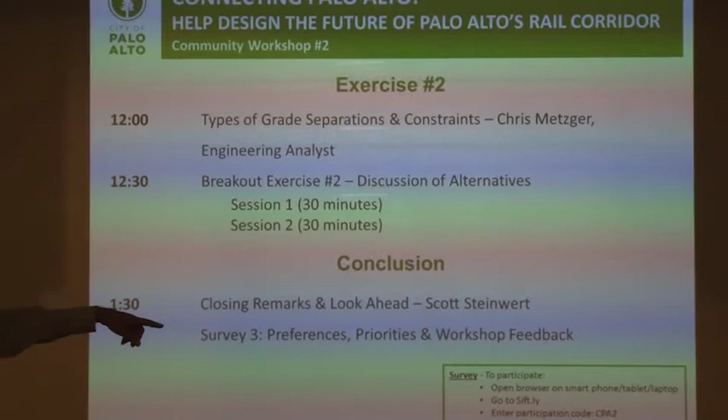Great, so we're going to break into groups now. You're already mostly at your tables. Everyone, these are location specific. The two tables up here are for Charleston, so if you're interested in Charleston and not at a table, you should come up here. Then we're going to switch after about 30 minutes to do a different location.

Again, as Josh and Chris said, we're going to go through at the tables the different types of crossings. This is not to pick one and say that's what we're going to build, but to go through and understand the different constraints and issues associated with different approaches. Then the idea is to get that feedback and start to knit together what kind of alternatives make sense. All right, 30 minutes and then we're going to switch tables.